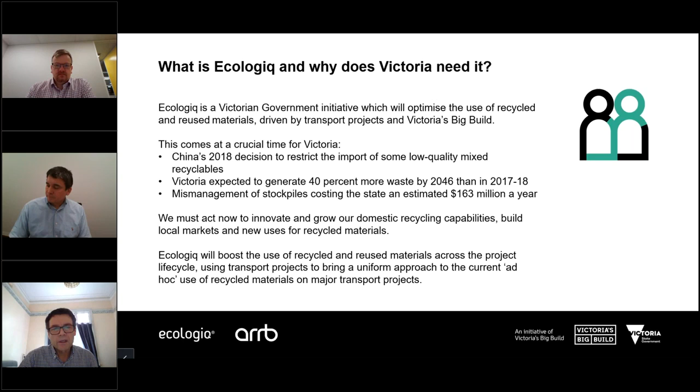So one way will be deliberate, and an approach to this sort of a way of making it uniform is the Recycled First policy. This is government policy released in about March of this year and starting to be enacted now, where we're requiring bidders on all major transport projects to demonstrate how they'll optimise recycled and reused materials. There's quite a bit involved in delivering that, including developing a Recycled First plan and a number of other initiatives inside that. And that will lead us towards the realisation of a circular economy through the greater use of those materials on those big build projects.

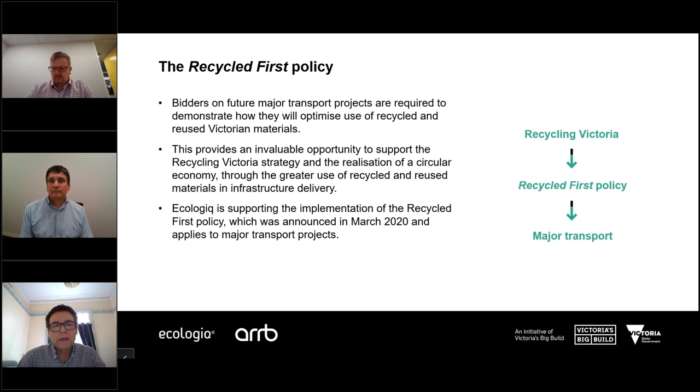We see that as then being leveraged to move into all of Victoria's road and rail assets across DOT and local government as well. And through that, creating this new norm or business as usual way of both delivering and maintaining assets. So with that, I'd like to hand over to Michael to carry on with the presentation. Thank you very much. Thank you very much, Tony.

Today we'd like to talk about demolition waste, and of all of the presentations in this webinar series, this is one that's probably talking about one of the most mature uses of material. Demolition waste has been used and permitted in Victorian Department of Transport roads for some time. So this is largely established practice.

However, I think it's worth re-advertising the concept for those that aren't familiar, and patting ourselves a bit on the back, I think, too, for having taken things from opportunistic, as Tony said earlier, to routine practice. What is demolition waste? Well, the two primary ones that we're going to be talking about today are recycled crushed concrete and crushed brick.

are the two most common ones. They usually come from construction projects or deconstruction projects, and sometimes from road pavements as well, although there aren't a lot of concrete and crushed brick or brick pavements in Victoria. In Australia, approximately 9 million tonnes of recycled concrete aggregate and just over 1.3 million tonnes of crushed brick are stockpiled annually. And these are engineering materials. They've been constructed for an engineering purpose, and the reclaimed material can be reused for engineering purposes.

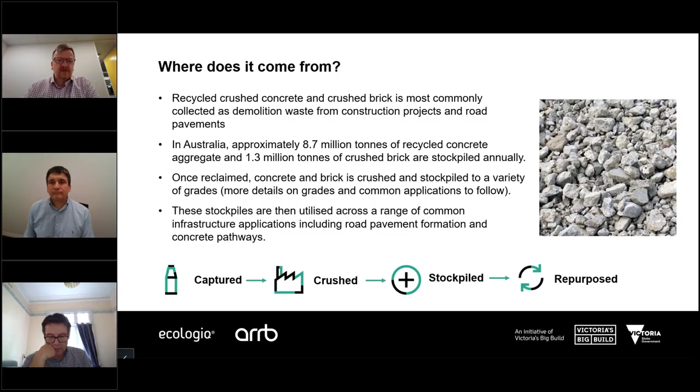As I said earlier, crushed concrete and crushed brick are engineered products. The desired gradings can be produced in the production or the crushing of the material. It's a controlled process as much as it would be in any one of our quarries dealing with virgin aggregate. Crushed concrete and crushed brick is commonly used as an unbound material in our road construction. It can be used in bases for lightly trafficked roads.

There are some concerns with crushed concrete re-cementing with time and causing reflection cracking, which tends to be a concern more in heavily trafficked roads, and therefore in the heavy traffic roads, the predominant use of crushed concrete is usually in sub-base material, including freeways. And there are heavy-duty motorways, freeways, arterial roads in Melbourne that have crushed concrete sub-bases. And by crushed concrete sub-base, I mean 100% of the sub-base is crushed concrete.

Approximately 50,000 kilometres of the road network in Metro Melbourne has pavements that have bases or sub-bases that are constructed with cement-treated aggregates. And as you'll see later, those sub-bases in the heavy-duty roads tend to be re-cemented deliberately as part of the design concept. And crushed concrete can also be repurposed for use in pathways.

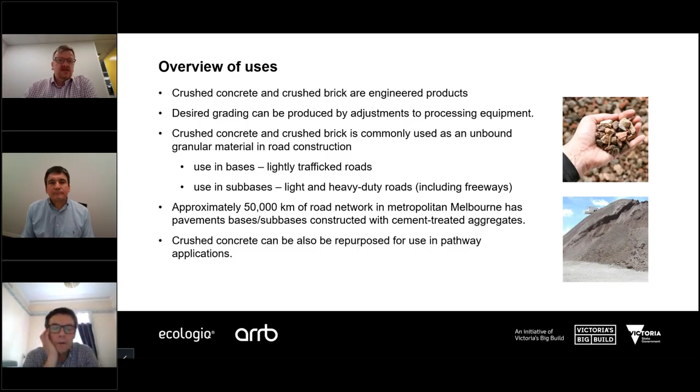I'd like to show you two different types of road pavement. These pretty much represent the extreme ends, I suppose, of the types of pavements that are typically constructed by the Department of Transport in Victoria. And in both of these pavements, there is a role for crushed recycled concrete to be substituted instead of using virgin aggregate. The pavement on the left is a very typical Victorian urban heavy-duty pavement. This is the sort of road that you'd see on a newly constructed freeway, or for that matter, an older constructed freeway. Hume, Monash, Eastlink. It's a thick asphalt pavement, typically a minimum of 175 millimetres of asphalt material.

It sits on top of a cement-treated sub-base. Now that sub-base can be either virgin aggregate or it can be purely crushed recycled concrete. It's approximately 200 millimetres thick, and cement is added to form a bound material, so we expect it to be bound. So the re-cementing of the material isn't a problem there, it's desired, if anything. So that material can be 100% crushed recycled concrete.

That sits on top of an unbound sub-base, which is also a working platform that the rest of the pavement can be constructed on top of. That can be either a Class 4 virgin aggregate or a Class 4 crushed recycled concrete. The Department of Transport specifications pretty much treat the materials as equivalent to each other.

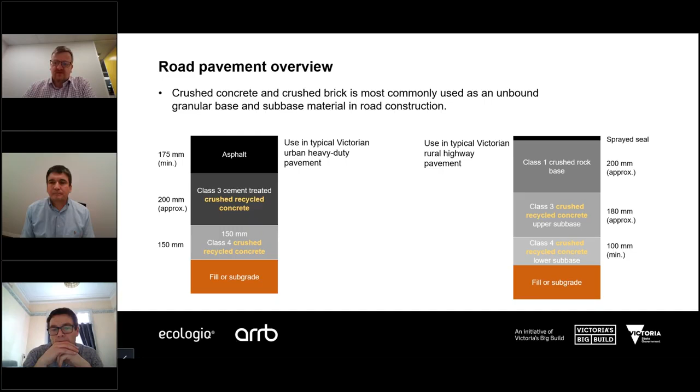So you can see that at the extremes of the VicRoads environment there, oh sorry, Department of Transport Victoria, sorry, old habits die hard, there is a perfect use for crushed recycled concrete as a 100% replacement for virgin aggregates.

We can also add crushed concrete and crushed brick as a supplementary material in our crushed rocks. So if the bulk of the material is a crushed rock, we can have components of that crushed rock material being crushed concrete and brick. And this table highlights the current Department of Transport Victoria guidelines. So the class 1 crushed rock that I spoke of earlier, you couldn't use crushed concrete in it, but you could actually have up to 5% of that material being crushed concrete if you so wished as a supplementary material.

However, if you look midway through that table, you see class 3 crushed rock, source rock, that could be 100% crushed concrete. And that's the example I was talking about in the rural pavement. And you can see similarly, brick can be used in small percentages in class 1 material and in increasing percentages, up to 50% of a class 4 material could be composed of crushed brick. So there's definitely a use for these engineering materials in our new road construction.

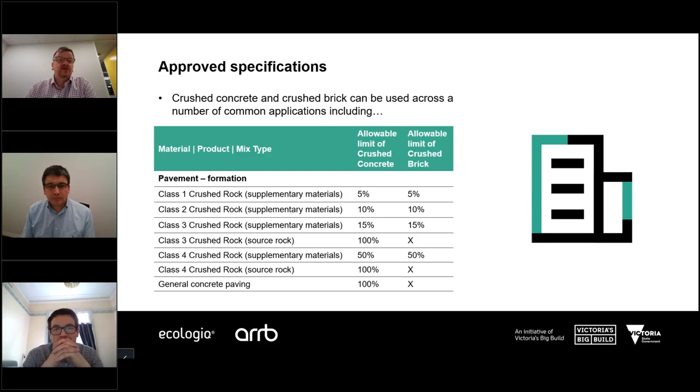One thing I do want to talk about is the difference between design inputs and performance outputs. This will become a little apparent as I go through. If we have a look at the different types of materials that we design our pavements with, we can see that there's a difference between how we characterize those in a design process and how we actually expect them to

perform. When we're designing an unbound crushed rock or crushed concrete pavement material, the two design inputs that we're interested in as pavement designers are modulus, just Young's modulus for the civil engineers in the audience, and the California bearing ratio, the CBR. Both of those are indications of the stiffness of the material. From the pavement designer's point of view, that's all we care about is the stiffness of the material.

The way that material will perform in the field, the main distress mode that we expect to see as the pavement nears the end of its service life is deformation of the material. And deformation is largely unconnected to stiffness. So our design input uses parameters to do with stiffness. Our distress is deformation. And there's very little link between the two.

Similarly, for cement treated crushed rock or crushed concrete subbase materials, we're interested in modulus, the unconfined compressive strength, again, stiffness, strength, and we're interested in the development of fatigue cracking or crack resistance. Now, there are two modes of distress that we expect to see in these materials. There's deformation, which again is unconnected to the modulus, the unconfined compressive strength, and the fatigue performance. However, the cracking mode is directly related.

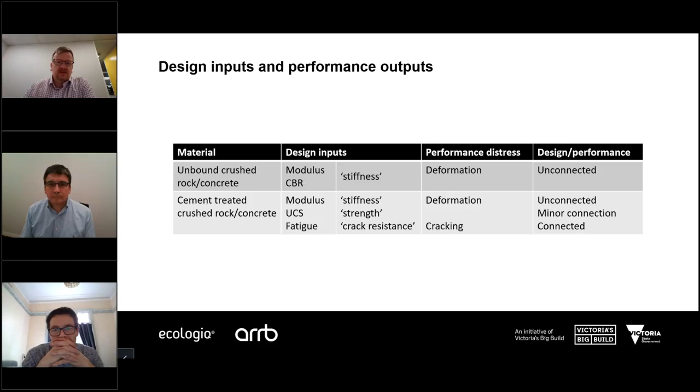The characteristics that we use in the design process for fatigue cracking have a direct bearing on the performance. But you can see for the majority of the performance, there's a complete disconnection from the pavement design process to how they perform in the field. And the way we get around that problem is through material specifications. The design method cannot act alone. It must act in concert with material specifications to achieve the desired outcome.

And the details about material quality, how to achieve quality, what's permitted, what's not permitted, is all buried in detailed Department of Transport Victorian material specifications. The pavement design process just assumes that you will be using good quality material. The definition of what a good quality material is is in those specifications. The two in concert will get you to achieve your desired performance.

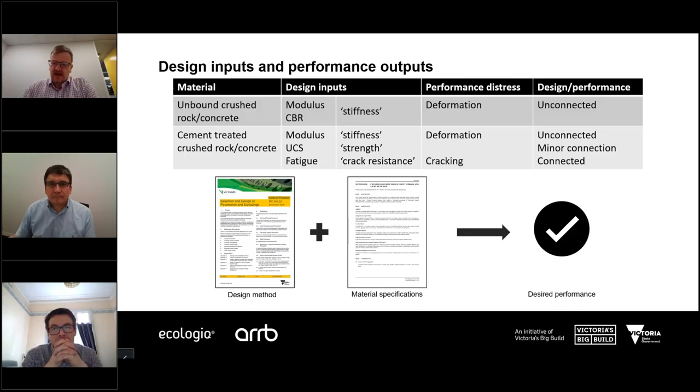Very interesting topic, use of demolition waste in transport infrastructure. Now, as Michael says, the question is, will these alternate materials perform with the recycled first policy? You know, we want to be sure that the products that we use to build our infrastructure will give us that long-term performance that we look to, and the public looks to in that public asset.

Fortunately, there's a very strong evidence base for the performance of these materials, and one very significant example is the Western Ring Road, now known as the M80. This motorway was built to the west of Melbourne in the early 1990s, and it was the first design and construct of a major project in Victoria. That enabled the designers and constructors to innovate and try some different things that weren't common at that time. In this case, they replaced the cement-treated subbase with recycled concrete aggregate as a cement-treated subbase in many of the sections. So how did that go?

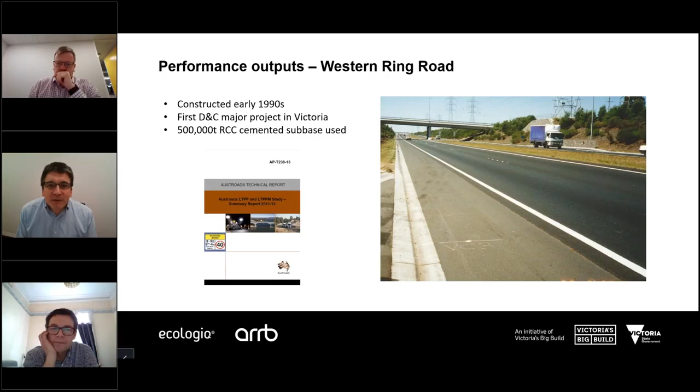So the pavement, which is a heavy-duty asphalt on cement-treated pavement on the Western Ring Road, the original pavement has performed very well during its entire design traffic. And of course, around that time, it was actually upgraded and widened to cater for that additional traffic. So it's a good life cycle picture of how this pavement performed. We move to the next slide.

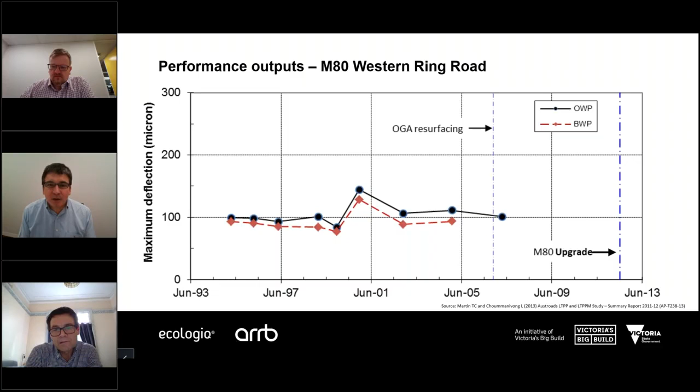And apart from that odd data set just around 2000, the data shows a very stiff pavement for the whole life. And again, that is representative of a very good performance of this pavement with recycled concrete aggregate as a subbase over the design life. Next slide, thanks.

So let's have a bit of a chat about some barriers and opportunities to using demolition materials in our road transport infrastructure. Next slide, thanks. So some of the considerations are listed on this slide, and as Michael said, we're really trying to develop engineered products using recycled materials, and these involve quite detailed material specifications and, of course, construction quality.

So one of the barriers is potential for contaminants in these aggregates, and as Tony mentioned before, if we manage our stockpiles of recycled materials to the highest degree, we can avoid, I think, the costs of mismanagement of stockpiles around over $163 million. So contaminants are a key issue. One of the ones in recycled crushed concrete that we're quite good at managing is asbestos contamination.

And in fact, while Victoria's been using recycled concrete aggregate for maybe 30 years, Western Australia Main Roads Department is only just allowing it, and they were too concerned about contaminants. So that can be a barrier. As I said, it's an engineered material, and we need to meet specifications and have good construction quality. So trial batches are important to understand how this material mixes and how it goes down.

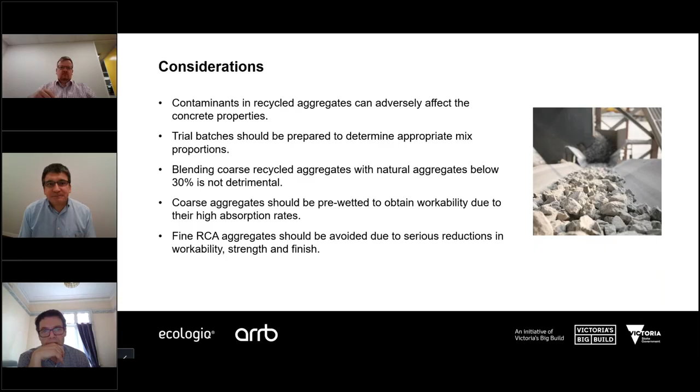So as I said, improving stockpiling techniques, managing where the aggregates or material comes from, which demolition site, and keeping the good stuff together and maybe separating out the not so good stuff or the undesirable materials will lead to its highest best use. So stockpile management is very important, and using trials to test the materials.

The other area that I'd like to talk about is specialised testing, because as I said, we've got a good evidence base on how these materials perform, and we've been seeking to link their performance back into the laboratory and develop specialised tests that are very good indicators of their performance. Next slide, thanks.

In terms of specialised testing, I'd like to talk about two areas. As Michael Moffat said, one application is use of demolition waste as an unbound granular material. And in that case, the performance is related to deformation or rutting of the pavement. Now, we do have a laboratory test, a large format wheel tracker test, that can give us a very good indication of the rutting or deformation performance of various materials in the field.

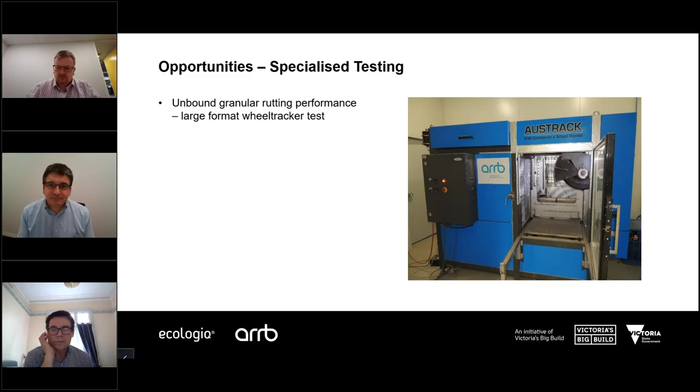So you can imagine a rolling wheel load applying up to 40,000 loads, and quite a heavy load as well, representative of a truck load or an axle load, and then the development of rutting in the material. And it's quite a large sample. As I said, it's a large format wheel tracker test.

Through this test, we can trial, as I said, any type of combination and gain confidence in how that material might perform relative to either a pure recycled crushed aggregate or a virgin crushed rock. So if we've got a good history on a crushed rock that we know works, we can see how our alternate materials and pavements will perform in deformation using this specialised test.

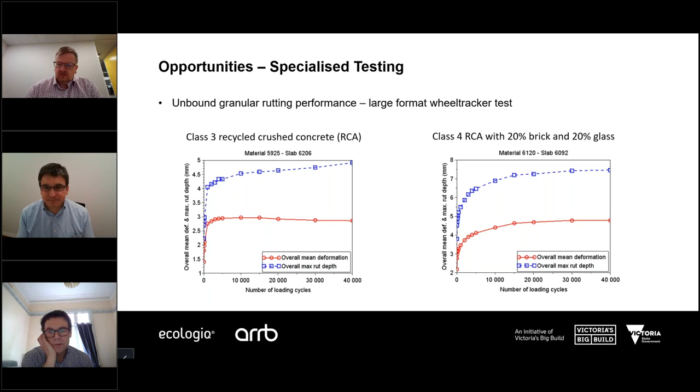So as we said earlier, in design, a cemented subbase or a bound material might be the application for the recycled aggregate, and we need to understand the properties of that cemented material. The newer specialised testing we can do is a 4-point bending flexural beam test. Normally we'd measure just crushing strength, as in unconfined compressive strength, UCS. This new test enables us to measure the flexural strength of this cemented material. It also enables us to look at the flexural modulus, and that's a design input, as well as the fatigue performance.

So in this case on the left, you see the test rig. It's quite a professional test rig these days, and 4-point bending. So the beams are a 100mm square cross section. They weigh about 10 kilograms each, and we usually cure them for about 90 days to get a representation of their long-term life. And on the right, I've got some example results for flexural modulus represented in gigapascals, or you could say megapascals. Often in Victoria, a cemented subbase is designed as a working platform with a 500 MPa modulus, or a 0.5 gigapascal modulus that's shown in the red dashed line.

And the chart shows the results for a recycled crushed concrete aggregate in the middle, which is about less than 10,000 MPa, 10 gigapascals, and how it relates relative to a range of other virgin materials. And you can see they're right up there in terms of flexural modulus, and certainly well exceed a design modulus of 0.5 gigapascals. So quite applicable to use, and hence we can see the good performance as I showed earlier on the Western Ring Road over many decades.

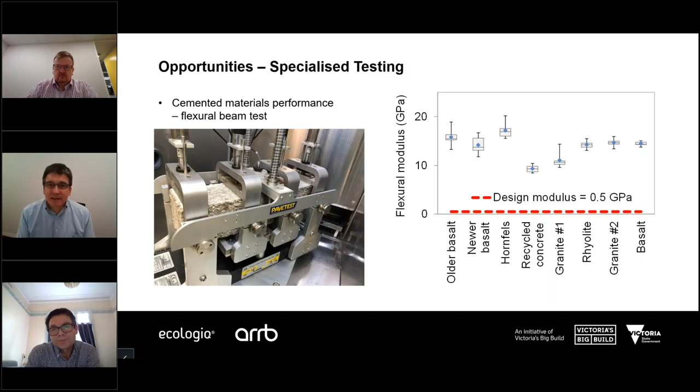So let's look at a couple of more recent or current case studies, and the first is the Mordialloc Freeway. So this is a new 9-kilometre motorway that will link Mornington Peninsula to the Dingley Bypass. And there's been a whole lot of use of recycled materials. As Tony mentioned, this is now policy. So 100,000 tonnes of crushed concrete in the subbase, so that's very good. And another 400,000 tonnes of crushed concrete in road drainage applications on the job. And certainly there's potential for more use as the project progresses.

And I'm very much aware that they're using recycled or reclaimed asphalt pavement quite strongly in this construction job. So it's also the first to use the new road base product, which includes glass and crushed brick, as I mentioned before, that you can have any number of combinations, and you can test the engineering properties of these prior to use. And lots of other sustainability measures on this project, including recycled water and renewable energy sources.

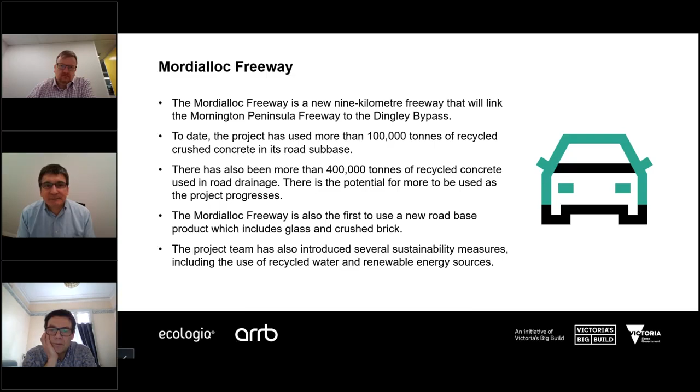So another one is the Caulfield to Dandenong level crossing removal project. So often on these jobs, there's the need for temporary works. In this case, there was a precast concrete yard needed to be established, to produce more than 2,200 precast concrete segments for the Skyway, the elevated rail line. So for these temporary works, more than 17,000 tonnes of recycled concrete were used in the foundation, and also a specified mix for the precast concrete segments included 21% cement replacement through the use of fly ash, another recycled waste product.

So again, a range of energy saving initiatives were also implemented, and the precasting facility operated 24/7. So use of rainwater tanks, LED lighting, renewable energy sources were adopted. So these are really good case studies of where we can use demolition waste, and we can save on energy, we can recycle water, etc.

Lots of opportunities for this, and as I said, it's all about engineering properties, management of stockpiles, specifications, good construction quality. We can get really good outcomes from using demolition waste in construction of our new infrastructure.

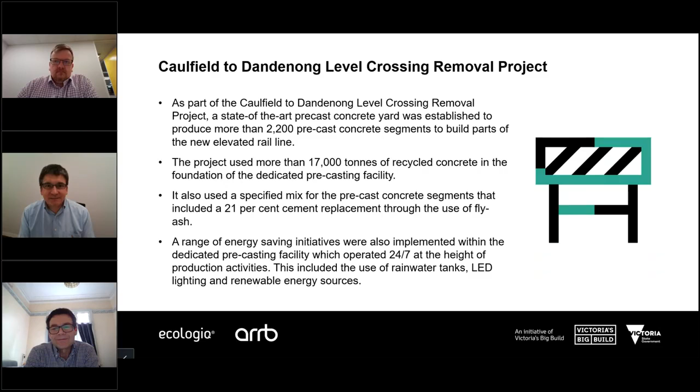Perfect, thank you all. We have a question that's come through from Joanna, and they have asked if you can explain the difference between the different classes of recycled concrete.

Oh, Mike, I think you're self-muted, so you might just have to unmute yourself. There we go. Now I'm unmuted. I think we may have double muted me there.

The actual answer is it's more to do with the different classes of crushed rock, the virgin material that the crushed concrete can be used as a substitute for. There are different grading requirements, and by grading we mean the different particle sizes that make up the crushed material, from very fine material up to say 20mm size coarse rock. Crushed recycled and the different classes of material for crushed rock will have different sorts of levels of performance.

Like a class 1 material differs from a class 2 material in that it has what we call some plasticity in the fines. It means the small fine component of the crushed rock material has a bit of clay in it, and that makes it easier to work with, which means that you get a smoother ride quality. So class 1 type material will give you a smoother ride.